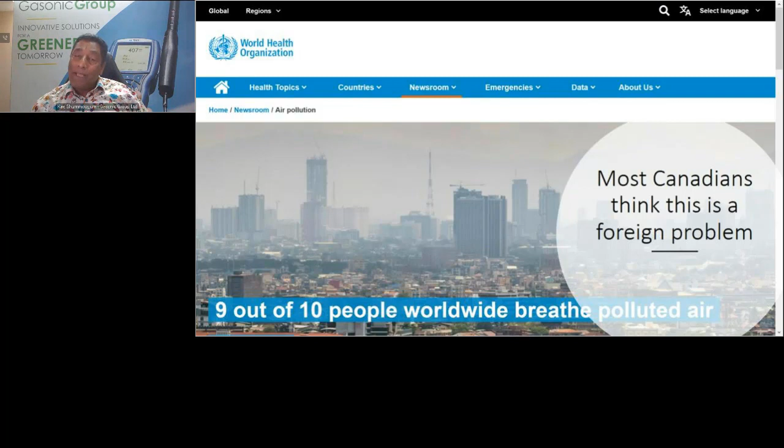And pollution, unfortunately, is invisible. And therefore, we don't know it's there. Sometimes the visible become invisible. And then we realize, oh, that was pollution. Now, why should we care about clean air?

I saw this from 2 guys that are selling these bottles of air to China and so on. And I called them up and I said, look, I'm sure you built this company, but not to sell it to Canadians because we don't want to be polluted. And the guy said, yeah, but we want to sell it to China where it's really polluted. And I said, please send me 50 of these bottles. I'll buy 50 bottles from you, and I'll think of a way of trying to tell people that air has to be clean. That's very important.

In fact, here's a bottle of air, and this is what people do to breathe air. I'd like to say all of us have to understand that pollution has to be controlled, or our kids will have a bottle of water in one hand and a bottle of air in the other hand. We don't want that to happen.

Now, it's a myth that we've got the mountains and hiking places and all the rest of it. A British newspaper, The Guardian, actually wrote this article that says, the great indoors. Us as Canadians spend a lot of time indoors. I mean, the cold weather for one thing. And we end up spending a lot of time indoors, obviously with the pandemic, even more time indoors. And it's probably 90%.

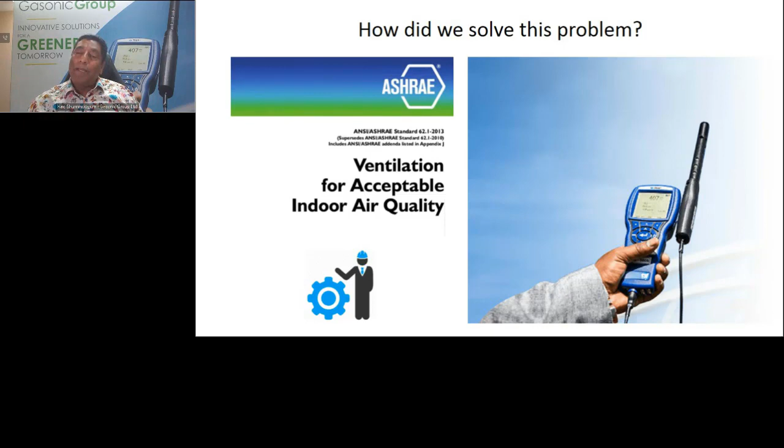It's expensive, and we need to really deal with that. And what I learned here applies after COVID. After we locked down for 2 months, I decided that I'm not going to look at energy. I'm going to turn my fans on as soon as we get into the office and keep it running. My electricity bill just doubled, but it helped out. We don't have an issue. So that was how we solved the problem.

And then we decided to go green, of course, building construction using LEED, and we had bronze, we had silver, we had all of that. And it helped tremendously because now we're using material that would not off-gas. We were using CO2 monitors in some cases to deliver air in buildings based on occupancy. So if you had a conference room, or schools would be a good example, you could essentially bring more air as you get more people in. But you really didn't have open windows, you really control the air at the same time, because that's what energy efficiency is.

And we built over the time. I came in the time of the boom, and essentially you could see cranes over Calgary building the same way, glass buildings without any windows. And the air got delivered. Sometimes the air got delivered from the top of the building, which was okay. Sometimes it got delivered next to maybe a bus stop. I know one of the buildings, I had complaints on that. So if you take the air from the alley or from a place where there's a bus, there's always complaint inside the building, because now you're bringing what we call fresh air, but it's not quite fresh.

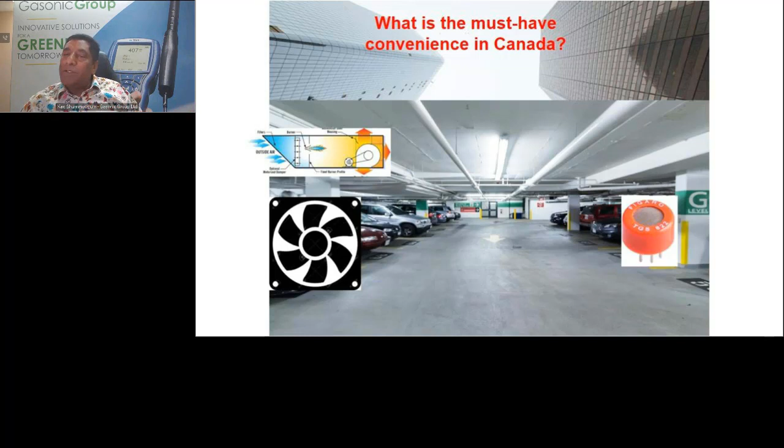And the building code essentially came up and says, if you have a closed garage or parkade or a place where your car is repaired, for example, which is a different situation because now you've got workers that are protected by occupational health and safety, but they use the same technique, you would limit the concentration to 100 parts per million. And I don't know where that comes from. It's got no relationship to health. It's got no relationship to air quality and so on.

So essentially, they pulled this number out of the air, I think, and said, let's throw in a number and people won't die, and put it at a certain level, which turned out to be good breathing levels, so that's good. But imagine if you have a kid, 2 or 3 feet up, the air he or she breathes is different, right? I would definitely not take my dog in a parkade because the dog is breathing very low and exhaust pipes are almost at his level. So we solved the problem just because we didn't get any complaints and we didn't really kill anybody.

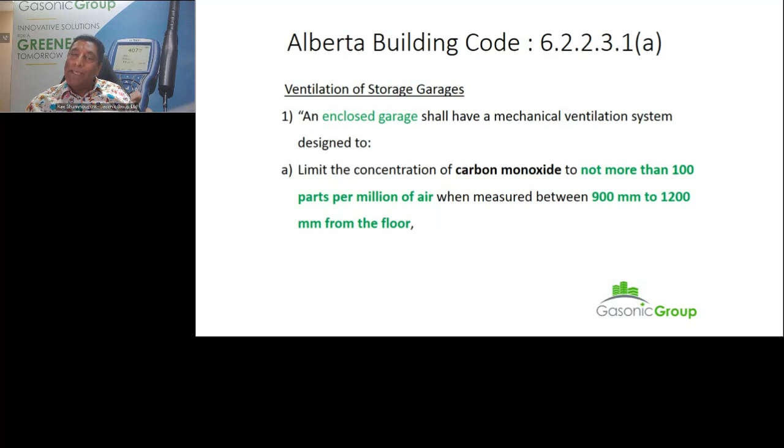We sent a lot of people to hospitals, and it was a bit hush-hush because a lot of it didn't get into the news, but that's how we solved the problem. And I was fine selling detectors and calibrating them, which was like really harsh.

And then one day I went to Canada Place in Edmonton. At that time, I was doing some of the calibration, especially out of town. So I got into Canada Place. I finished my calibration about 4 or 5 o'clock, if I remember rightly. And I was just about to return the keys, get back into my car, and I see a lineup of cars. And I realized that the theater had finished opposite that building, and everybody was going at the same time. So they had an attendant taking money at that time, and therefore it basically had a lineup.

So I said, I'm going to have an early supper, and I'll come back to my car. So I reparked my car. And when I came back, there were people being taken to a hospital in ambulances. And I don't know how many people, but there were several people. And they opened the gate, let everybody go. And so that was a lucky escape. But I was really not happy with that. So I thought, I'm doing something.

I have a CO detector, and I could see the CO detector showing red alarm. And yet, I had no choice. I had 2 choices, essentially. Save myself in some ways, or go frantically in front of the windows of the drivers and say, stop your car. And I knew that would be difficult, and maybe somebody won't accept that. And therefore I said, no, I'm not going to chance that. And therefore I left. And this is the result.

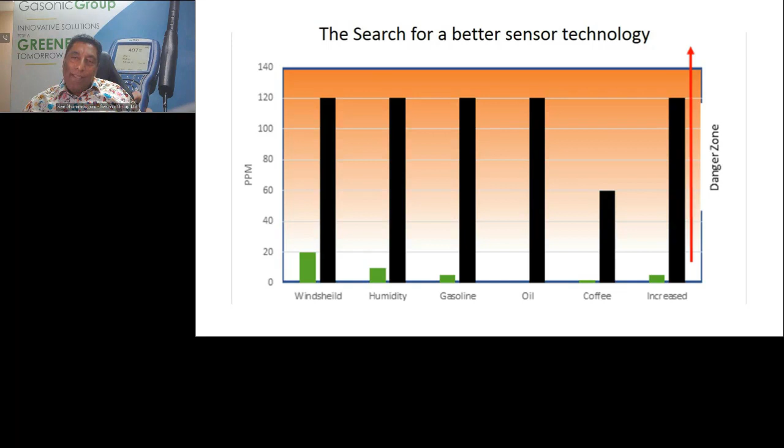He says, oh, come on, replace everything I have. And we end up replacing everything in the town of Banff. So that was interesting. I sold a gas detector using a coffee.

After a year, we went back, we put 100 parts per million, and it reacted almost exactly 100 parts per million, or plus or minus 10%. The solid state sensor, which was at Centennial, a building built in 2000, and we had gone back to solid state for that building because it was obviously competitive, and the sensor went all over the place. It either was very sensitive and it turned on the fans for too long, or it failed.

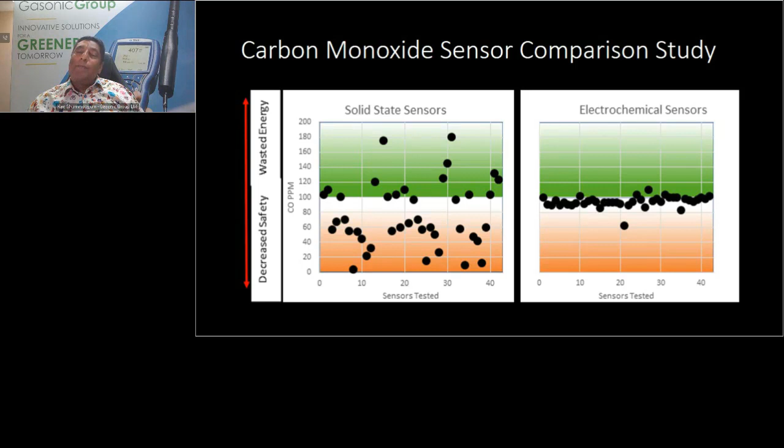And some of the failure was based on the fact that they painted the parkade, and it killed the sensors, right? So the solid state sensor just didn't perform. And I was really getting fed up with this now that I saw there was a sensor available that would work. The problem with everything is that it's the money. And it's also the design.

The sensor we had put in James Short, which are now being replaced as we speak to a better system, was just a sensor giving a signal to a building automation system. So I said, okay, I need somebody to design the sensor with the whole electronics or design it myself. And I did some research, and I said, okay, I'll think about building it. And I didn't really want to do that. I didn't have the resources at the time.

So I eventually found a company in Montreal called Vulcain. And I called them up and I said, do you have a sensor that would work better? And I spoke to a young engineer, Guy Gervais, who was taking over his dad's company. And he says, by the way, I have the same feeling when I go in a parkade. I try to calibrate something, and I'm not happy when I come out. I'm just wondering whether I'm going to get a phone call later that somebody's been sent to a hospital.

So knowing that he was hesitant, he was having difficulty speaking in English. He was just learning English. And I spoke to him in French. And from that time on, we became good friends. And he said, by the way, you speak French better than I do. I said, no, I don't speak French every day. But he says, you've got a different accent. We have a Quebec accent. So that was just a fun thing we got into.

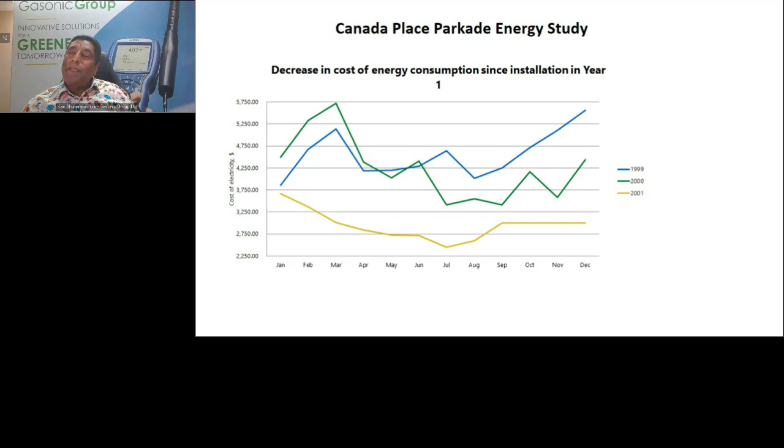In 1999, as you can see here on the blue line, he says, essentially, I'm not going to give you an order. I'm going to monitor my electrical consumption to my exhaust fan in the parkade. He had 2 to 3 levels of parkade, if I remember correctly. And he says, I'll just do a baseline study. And then I will get you to change 1 level, and I do the study again. And then the following year, I'll do another study. So it was 3 years that we had to upgrade. And as you can see, 2001, this line that goes straight is basically him saying, I've had enough. I'm going to stop the experiment. You upgrade the system. So we upgraded the system, and this is what we found.

It cost about $20,000 to upgrade, and we had $19,000 in savings of electricity. He didn't bother to monitor the gas savings because in a parkade like this, you would have to heat the air, of course, and his fans were running a lot. So we estimated $10,000. Then he had reduced calibration and reduced sensor changes because we had found the sensors actually last quite a while. So he was happy. He made his money back within a year, or one heating season, the winter especially, and he was really happy. He had the money.

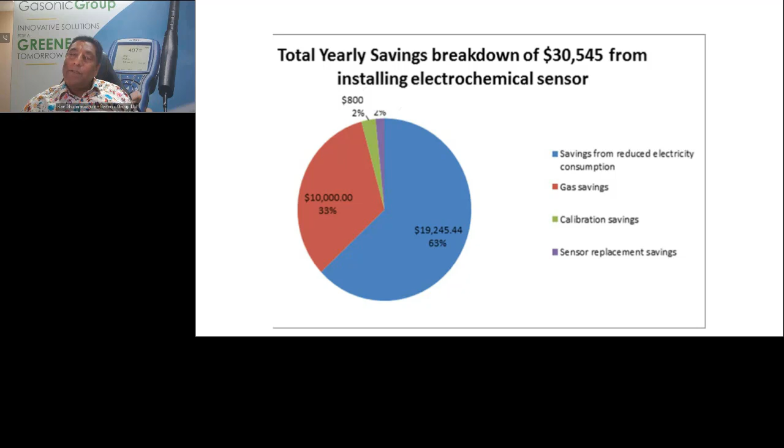And I had his data, which I was able to show a lot of people, and I came up with a figure, $50 worth of savings per parking stall. And when I approached buildings about this idea, it wasn't about health and safety, it wasn't about anything, it was energy saving. Remember, we had made our buildings energy efficient, and therefore we have to control the ventilation. Everybody was happy. We upgraded tons of buildings for quite a while, and essentially everything went well. And just showing that data, showing that graph, showing the drift of the sensor, everybody bought into it, and it went, like I say, very well.

But there was a turning point in the decision of the company. So if I wanted to make maximum money, a sensor that takes calibration 4 times a year at least, to me, it almost should be calibrated every month, is going to reduce the service costs.

Do I go after the money, or did I find a technology that would help the occupants of a building? And I decided, the way I am and why I'm in business, I jump onto it and say, let's upgrade, reduce the service department, less technicians, but upgrade. Everything went well. So that's what we did for a number of years. Not too many companies would do that because it's all about the profit at the end, but we did that. So during the next decade, we upgraded thousands of sensors for Western Canada, but mostly in Southern Alberta.

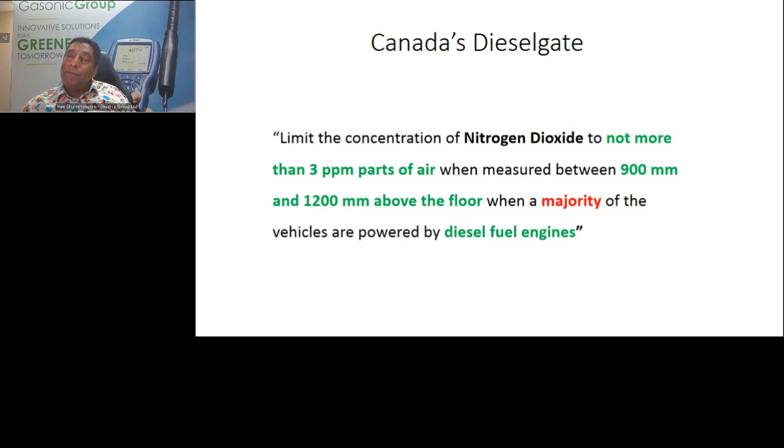It comes out as NOx, which is NO2, N2O, and so on. So it's very difficult. In fact, where it says 3 parts per million, it doesn't work. We have to put it even lower, even in an area of a loading dock where there's a lot of diesel trucks. So we're going to conduct some research. Hopefully we're going to partner with somebody and actually see whether these things work. And I'll be happy to work with anybody on really seeing whether that works. But so I put my business on cruise control, and 2018, 2019 was my year of reckoning.

And I got some data that although we think of sea level going up by a little, 1 inch or less than an inch, when you're on a beach, you're actually losing 1 foot. So we've lost about 15 feet, and in 15 years a lot of the beaches would be gone, because it's like the triangle math, where a slight rise would create eating of the sand. So I was sad about this, and I actually suffered something that I'm sure a lot of your kids are suffering right now.

It's eco anxiety. A lot of people are feeling anxiety, and I came back and I tried to go to a meeting to talk about climate change, and I got eco anxiety. I got out of there and said, maybe I won't talk about climate change. I have to find something else.

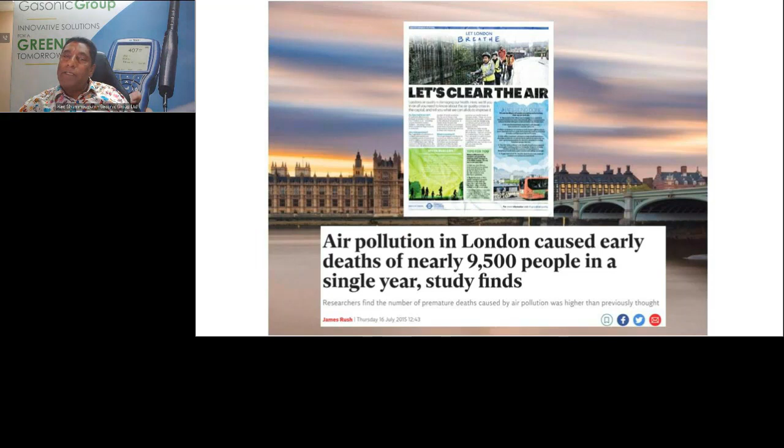But in London, the event that really changed it is this girl called Ella Adoo-Kissi-Debrah. She died, and her mother fought for her, and eventually it was written on her death certificate that she died of air pollution. And now everybody knows that there has to be changes. So in 10 years, if you go to London, all the buses will be electric, all the taxis will be electric, and the air will be a lot cleaner.

Does it need to take a death to change things? Sometimes, unfortunately, that's the way we operate. We have to be pushed. But London is well on its way to become a cleaner city, for sure.

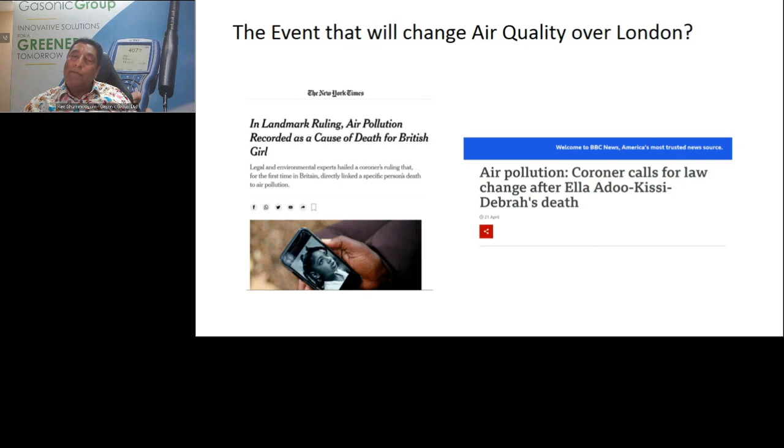And eventually there was an organization, when I did my research, Mums for Lungs, and don't mess with the mums. They go after the politicians. The mayor's race was on. The old mayor got re-elected, but he had to deal with air quality. And he decided he's going to put 50,000 car chargers in London. So there'll be something good coming out of this.

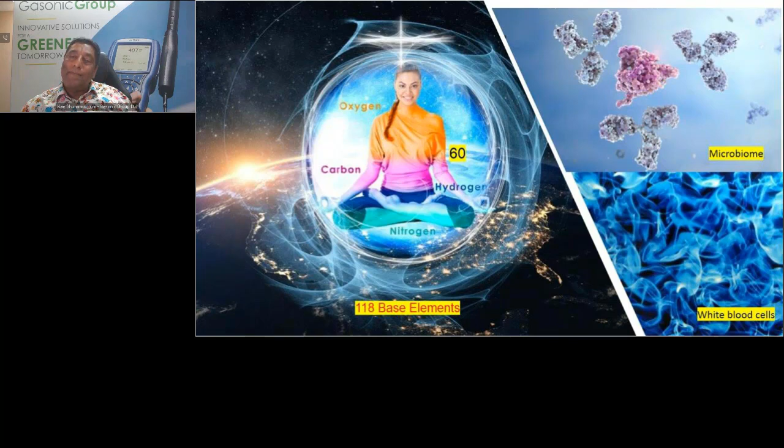So what we've done is gone through this big chemistry experiment after the Second World War and basically got the industry going, chemical engineering, and we produce 50 million new chemicals. Now, all of those chemicals, some of them would be neutral, some of them would be beneficial maybe for our health, some of the pharmaceuticals, but we don't know how many affect us.

And what we've done is toxifying our body by surrounding ourselves, on our skin, in the air. And with the air, you don't have any way of knowing, so you don't have a choice of breathing the air. You have to breathe. And you can bring a bottle of water if you want. Maybe you can bring a bottle of air, but this is not the life we want to lead. So the air, you have no choice.

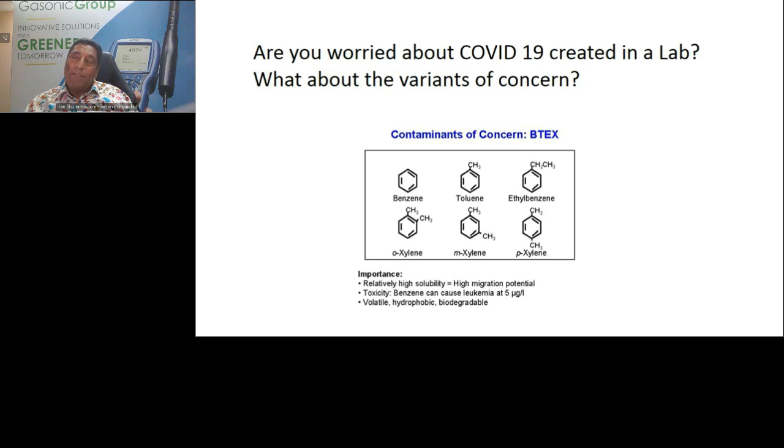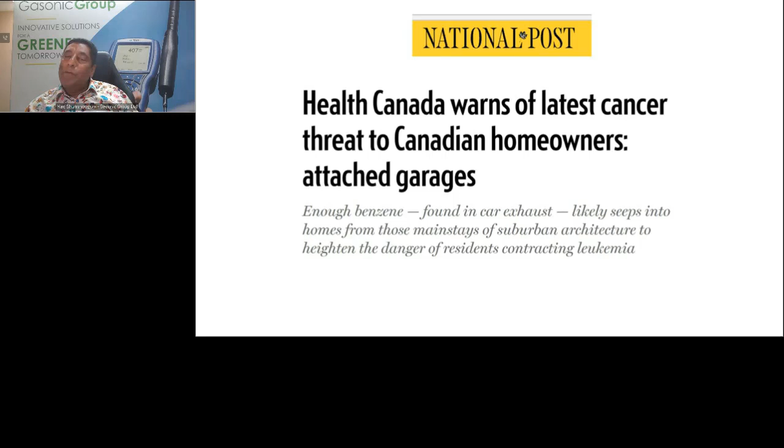Now, Health Canada, I've been in touch with them to try to do some joint research on air quality in buildings, because I think this is the next pandemic, and we've got to look at it, or the current pandemic, if you want to call it. We just had a break during COVID-19, but they talk about how benzene found in attached garages can cause increased leukemia, and benzene is a nasty one, and we want to see whether we could eliminate that.

So the universal right to pollute cannot be taken back, and therefore that's one of the issues we're going to be facing: how do we reduce pollution? And that's going to be a big challenge, because nobody's going to accept to shut their car off.

So what I did after the pandemic, we had 2 months, obviously, of lockdown. And like everybody else in business, owners had to figure out a way of making money and get paid back from what we lost. And so I decided I'm going to take my Tesla, put gases in it, and do calibration myself.

And I found that the first thing I needed to do is change attitude. I didn't want to go in as a technician. I wanted to go in and ask a question. What is the air that people are breathing? What is it like? And I discovered some surprising things. People didn't care about idling. I saw people that were having lunch and idling their vehicle and listening to the radio. I heard of a lady that idled her car, forgot to turn it off, took a plane and left.

And it took 30 hours of idling in a parkade. And I saw technology. I was standing next to a tailpipe doing a calibration, and I heard this engine go on, and a guy came out, and I said, "Why did you turn on your engine?" He says, "Who are you? I own the building. I can do whatever I want."

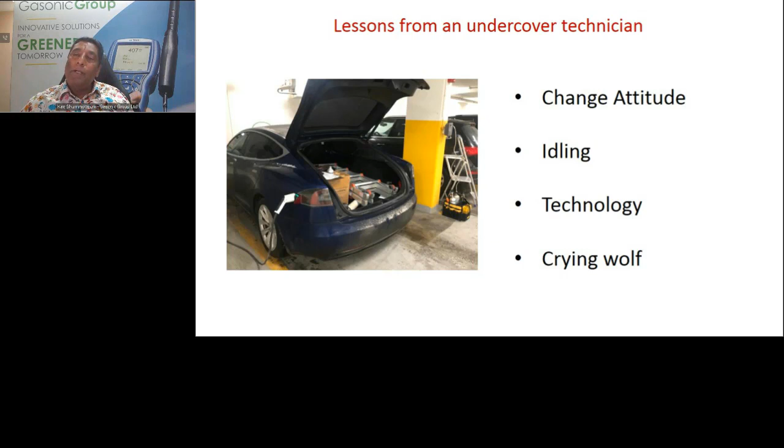The other thing I found is that sometimes the alarm came on just because it triggered the alarm, and people were ignoring it. So that was a major problem. So I did 70 buildings in Calgary, 33 buildings in Canmore. But the good thing is I could go in, do some adjustment, come out, feel happy that I could have cleaner air for people. And I was able to upgrade a few buildings in Calgary, including one where I found a baby was left in the car.

And I talked to the mother and I said, "The system doesn't work. Please don't leave your baby in the car while you go upstairs." And so she did that.

So what I found, though, in Canmore, which was interesting, and that destroyed the other myth, is the fact one day I woke up and I said, "There's something wrong with the air in Canmore." I could smell something. During the pandemic, I stayed out of town and was not exposed to exhaust gases myself. I'd become oversensitive, where now I could pick up exhaust gases.

And I said to my tech, who was there with me, "There's something in the air." I pulled out my CO detector. That was 5 ppm, town of Canmore. So although it's in the mountains, because it traps the air, and if you have a certain temperature inversion, what I thought was clean air could sometimes be polluted.

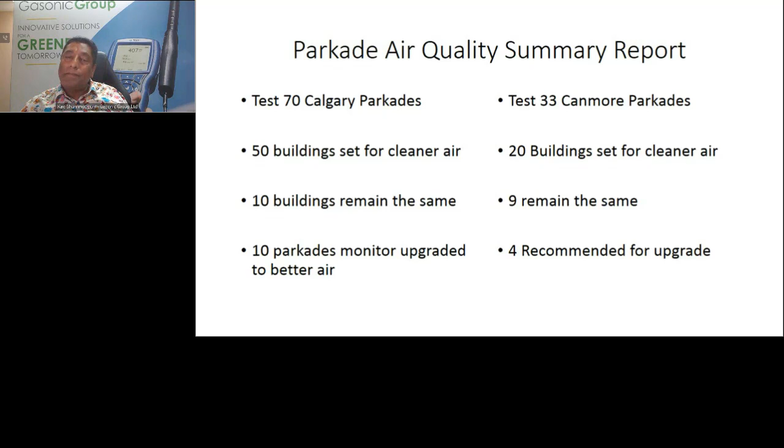And so what we've been doing is actually looking at lowering the level. As you can see, what I found was we were accepting a certain level of pollution in the parkades. So if a car starts up, the level starts to slowly go up, and pollution is in there all the time. And we've discovered pollution inside of cars, because it has somewhere it needs to go.

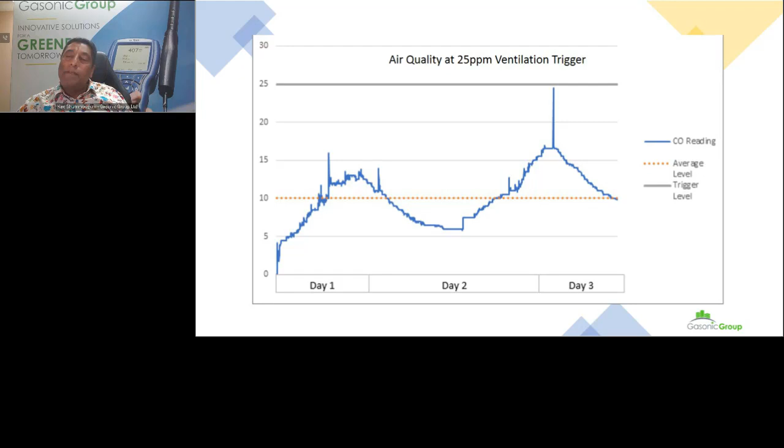But we're still investigating, we're still doing some research as we speak, and just trying something. Lowering the levels, would that reduce the level of pollution in parkades? And we found out that we could do that. It wasn't as easy because you have to be careful of not keeping the fans running all the time. But further research has to be done, and we can optimize the ventilation system to do that.

I was getting frustrated. We couldn't remove pollution from the parkade. And 2 weeks later, I got a call. Somebody says, "I came up with a paint from Italy that would actually reduce the pollution." And so we tried it. We built those 2 boxes, and this is the level with the control, and this is the one with the UV light triggering the coating. So that's worked out good. More about that later.

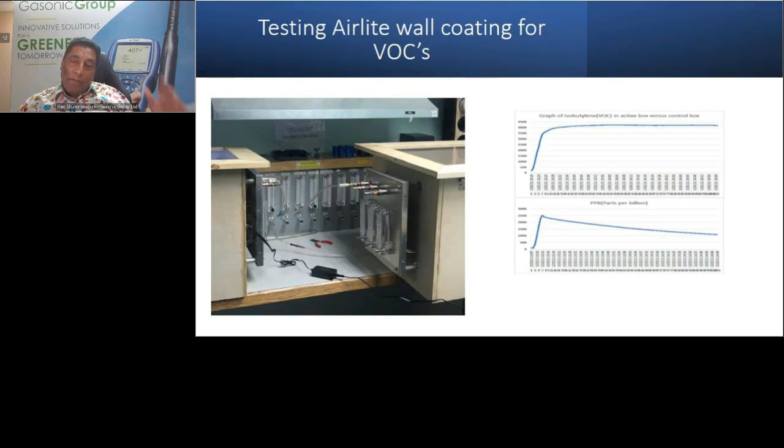Okay, so why pollution has to be removed from parkades as much as possible. I was called to this building in Eau Claire, to the penthouse, because the people living in that penthouse could not stay there anymore. They felt sick, they had to move to a different building, and it took months to figure out what was happening. Eventually, we thought it was indoor air pollution that was causing it.

In the meantime, they had basically put their own ventilation system in the building. And as you can see from the animation, what they did was alter all the flow from the parkade into their suite. And so every bathroom fan, every car exhaust was actually going right through their suite. And it was a toxic soup of various things. So we ended up shutting down the ventilation system, and it works. So you cannot keep pollution in a building.

We essentially live currently in two boxes. One box for a car and a box for our living space, but they have to be connected by an elevator because we don't want to go out. As a result of this, the air can move to any part of the building depending on airflow. So it's very important to check air quality from parkade to penthouse at times to solve problems.

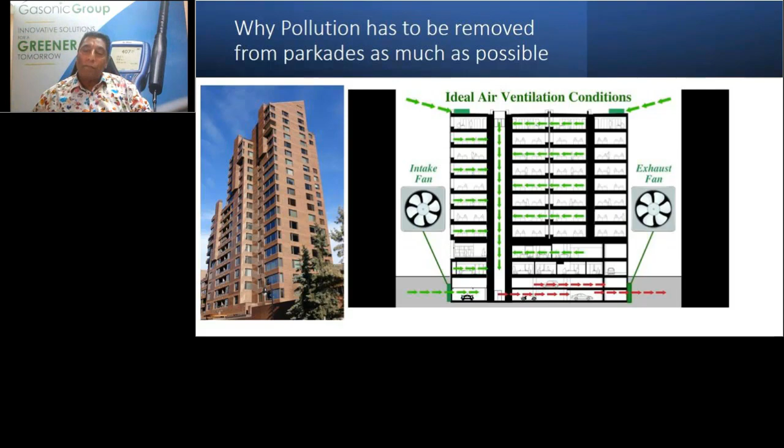Now, we've made a commitment from what I've learned in the pandemic, going out and checking out 100 buildings or more now. I want to conduct more research. We've been in touch with Health Canada, and we would work in collaboration with them and try to find out what the air quality is like. How can we improve the air quality in buildings? And I'm very, very confident we'll be able to achieve cleaner air for everybody in buildings.

Optimized ventilation systems for clean air is what we're going to try to do. Work collaboratively with all stakeholders. Technology is not a problem. It's the attitude we take. And everybody after this pandemic has to look at attitude. Are we going to help each other? We're now used to the fact that we take a vaccine to help the other person, not us. Are we going to do that in our building? Are we going to share things?

And I'm prepared to do an educational campaign. I've started YouTube videos, several of them, and I'll be going out to my customers and giving them this bottle of clean air and talk about message in a bottle. Does that tell you something? Do we have to deal with pollution?

Now, the other thing that I've investigated over this pandemic is the last few weeks I've actually volunteered to go to places where they're cleaning parkades, because since 2001 we've sent probably in the area of 100 people just in Calgary to a hospital because of exposure to carbon monoxide and dust particles and so on during cleaning. That's the highest time for incidents. And we want to solve that. We want to eliminate that. And I think we've got the technology to do that.